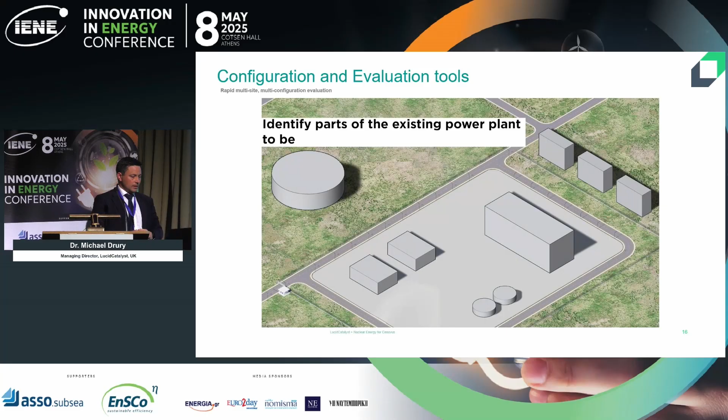So what we've done is we've looked at how we can repurpose old coal-fired power stations using this approach. We have a kit of parts that looks at the existing power plant and what can be reused and what can be upgraded or what needs to be replaced.

We look at how those advanced heat sources, the heat boxes - effectively nuclear reactors - can be positioned, not as one large reactor, but multiple reactors side by side, like Lego bits coming together to repower those coal-fired power stations.

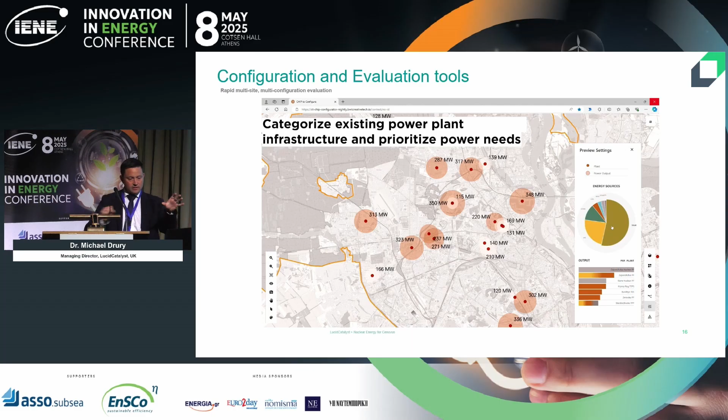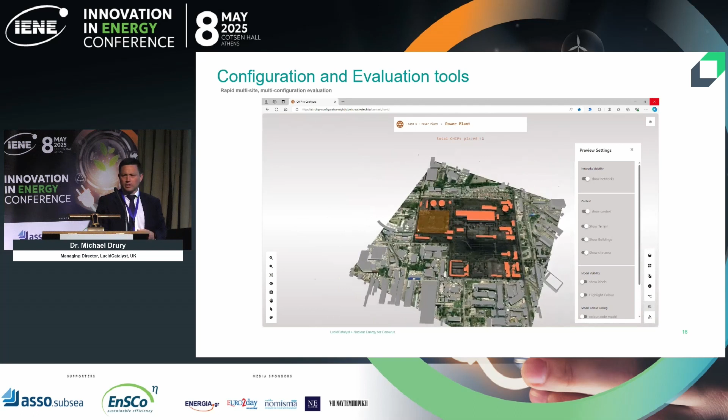We've looked at how we can optimize the deployment of those, how we can get the configuration tools, the software to look at, well, if I do it at this site, this site, this site, there's 15 different sites, or 40 sites, or 100 sites, how we can optimize the schedule to deploy that technology. So we can look in detail about what the configuration is for an open architecture.

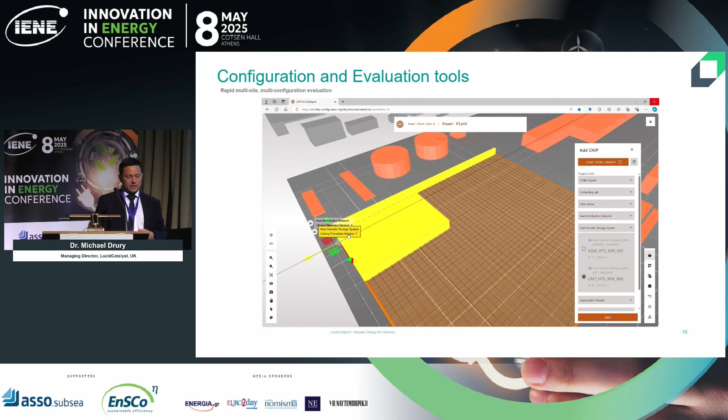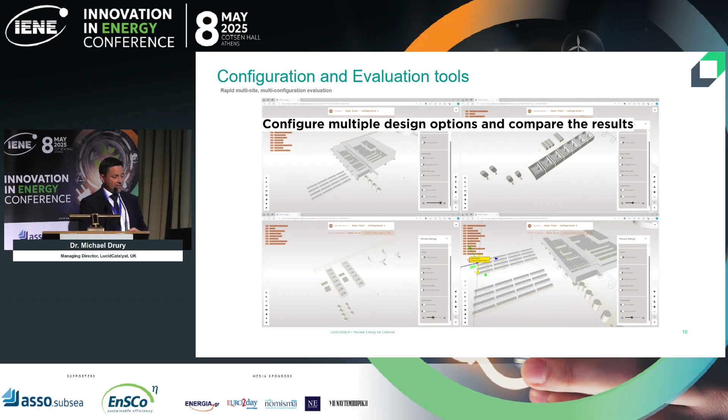So if you want to have a laptop, you have a USB port and you can plug it in. Everyone knows you need a USB port. It's almost the same you could do with nuclear. You can have the balance of plant where everyone knows if I can plug into that balance of plant, then I can put my reactor on it. But what kind of reactor would you have? You'd have smaller ones that can fit into that configuration architecture.

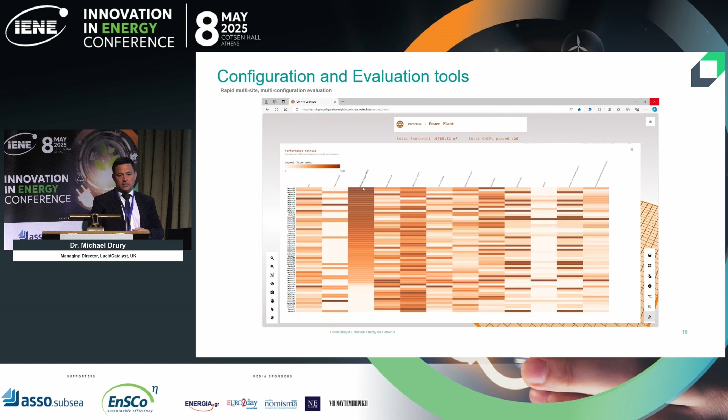By doing that, you can streamline what are the benefits to each region, each location, each site, and why is this the best way to deploy? What savings would you create? What kind of opportunities can you give to people with their workforces? How could you implement it with all the different industrial applications that are near it? What's the optimized approach for deploying nuclear technology?

So as I mentioned, we use an open architecture approach, which you can combine together on any of the sites with the site configuration tools that help you to map the detail of those sites. We use AI and digital licensing, and that's a big statement to say we use AI. But what I really mean is we're working really close with Microsoft on developing an artificial intelligence tool that allows us to do the site planning applications for any nuclear site.

So right now what we can do is we can generate your environmental impact assessment, not within 3 to 6 months, within 3 minutes, if not faster, if I'm honest. But what we have to do is we have to train that AI. So we train it and we develop it. Microsoft developed the back-end side of it, and of course it will use their Azure platform, which is where everything gets hosted.

So you'll have services that come out of the back end. But it allows us to develop that licensing application much, much faster, which is what you need to be able to support new industries.

So if you look at repowering using this approach, you could, yes, have coal-fired power stations with a standard module that fits into those stations, and you reuse a lot of the technology. But you could apply the exact same approach to shipyards and look at how you do fuel production platforms, or you could look at FPSOs and how the oil and gas industry could decarbonize.

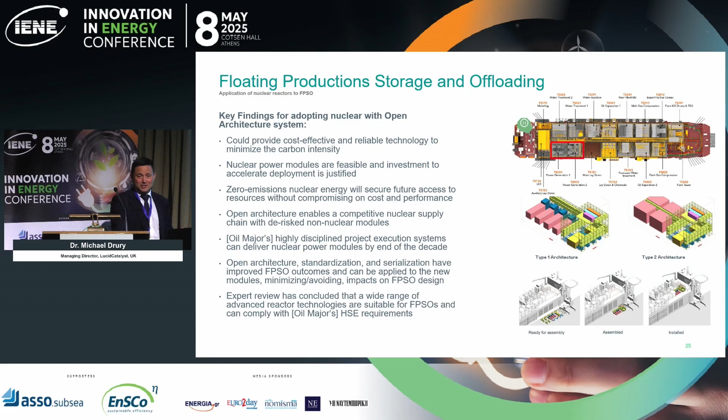And I'm not just saying this with nice pretty pictures that we've drawn. These are from where we've worked with customers, oil and gas companies, to utilize nuclear. That kind of sounds strange to me to always say oil and gas companies, but we're looking at not just a small-scale production unit with a small little reactor that does a small power. It's about being able to lump those reactors all together, and by doing that you can scale to any size.

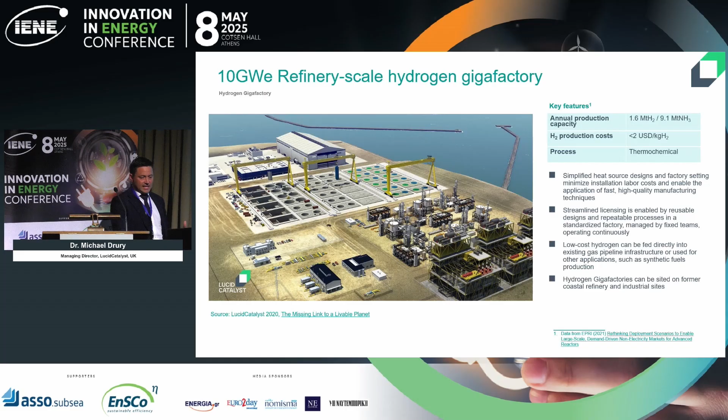In fact, this is a 10-gigawatt hydrogen gigafactory that we were looking at, in particular using a light water reactor technology. It doesn't have to, but this is the one that they wanted to look at. And you can start to see maybe there is a different way to get energy demand to sites, a different way to get that price of energy down with a bit of analysis to get the costs right down to be competitive.

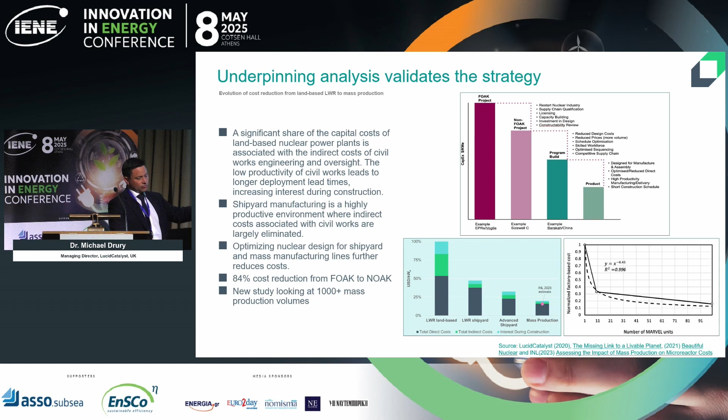Maybe there's a way that we can start to use that strategy, that analysis, to underpin how we get energy and the capital cost of energy from $6,000 per kilowatt down to $2,000 per kilowatt. Because if you can do that, nuclear becomes really, really attractive to every energy user.

So as we go through, we start to hit those new industries, and we have to work at an industrial level, and it's not just one area for nuclear. Now what we're finding is I'm no longer presenting to a nuclear audience. I'm now presenting to a lot of people that have never worked on nuclear. Data centers are calling me in, oil companies are calling me in to talk through how do we convert our cruise ship into a nuclear-powered cruise ship?

How do I convert our drilling rig to a nuclear-powered drilling rig? There's a lot of challenge, a lot of change, but the underpinning analysis that we do, working with lots of people that you'll have heard of - in fact, you can see some of those names on here - we start to really get into the detail of how you would do it for nuclear and what kind of things you would need to do.

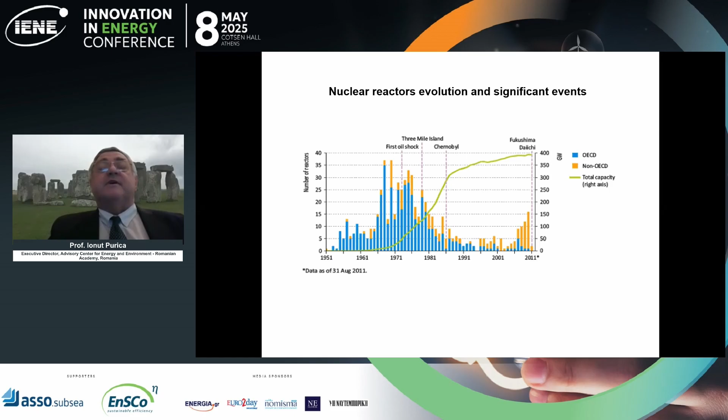And the idea is that although nuclear has saturated up till and a little after the Fukushima accident in 2011, now there's a new start with everybody doing various types of reactors.

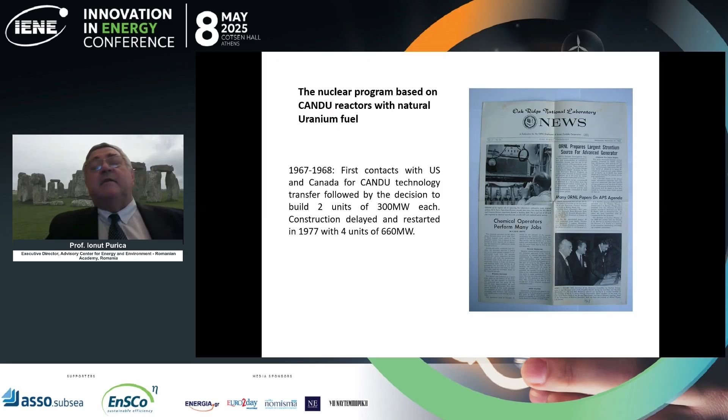Romania started back in '67, '68 to cooperate with Canada, with the approval of the US Congress, to transfer natural uranium fuel CANDU technology to a country that at the time was a member of the Warsaw Pact. Glenn Seaborg and Romanian Horia Hulubei were discussing and agreeing on transfer of technology.

And now Romania has a full fuel cycle, actually starting with uranium ore, with still sizable reserves of uranium, although we are buying outside the country just to keep our uranium in reserve. The fuel ore is processed into CANDU fuel.

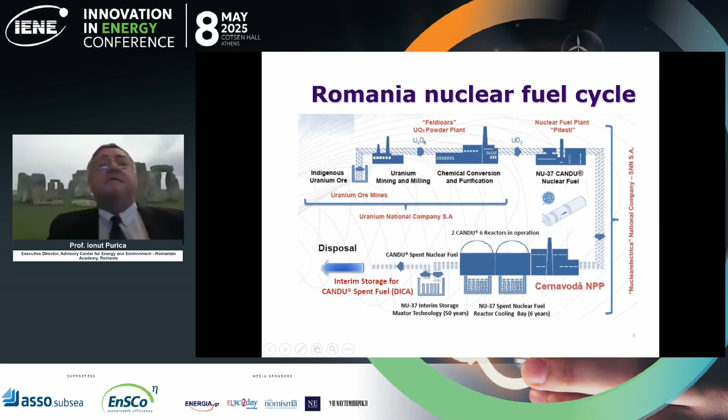CANDU fuel that goes into the power, 2 units, 700 megawatts each, in operation, and then the waste fuel is disposed. This is a picture of Cernavodă nuclear power plant.

The first 2 units are in operation. You don't see unit 1 - it's, wait a moment, it's here.

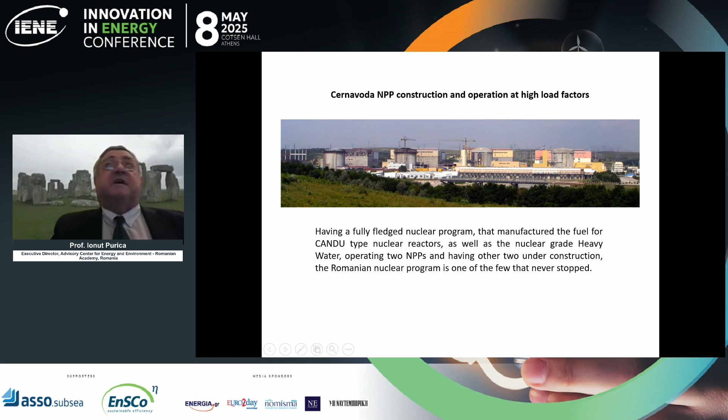And it's units 3 and 4 that are now under financing to be finalized. They are about 30-35% ready. Let me talk about the nuclear.

Sorry, it was the Minister of Energy on the phone, so I had to make a small pause. The idea is that units 3 and 4 are contributing to the security of the operation of the system, of the whole system.

And it's a very interesting thing that Romania is now doing first research on a type of small modular reactor and developing the construction of another type that was the first type of reactor certified by a Nuclear Regulatory Commission in the States.

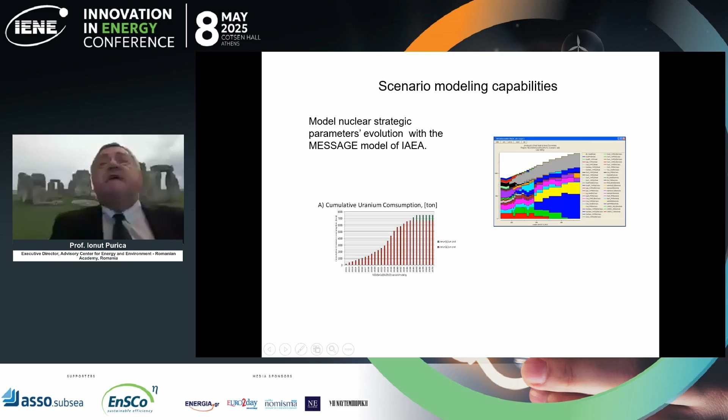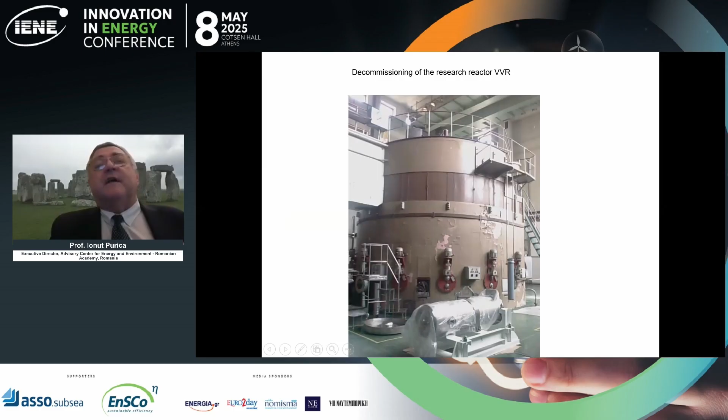Just to make a little history, it was called power reactors in small packages back in '68. And the United States had a full program of all sorts of such reactors that were either put in transport by plane, for example, put in some military bases, or in the McMurdo Antarctica base, also put on a ship that was sent to various locations to supply power and even heat.

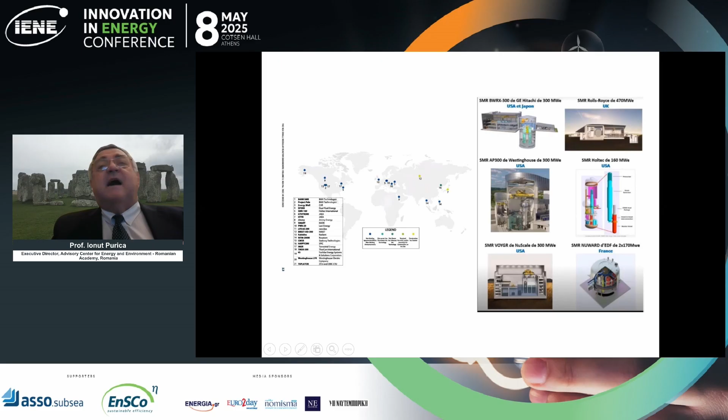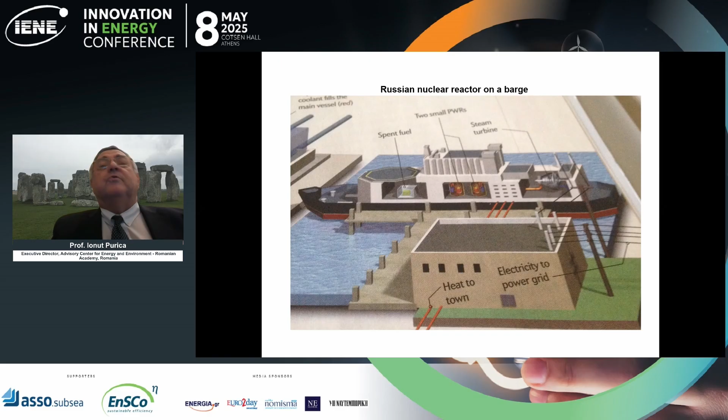Nowadays we have evolved a lot. There's a frenzy of small modular reactor designs. You have some examples, and obviously the Russians have put some reactors on a barge, and they are sending it on the rivers in Siberia to supply power and heat to the cities there.

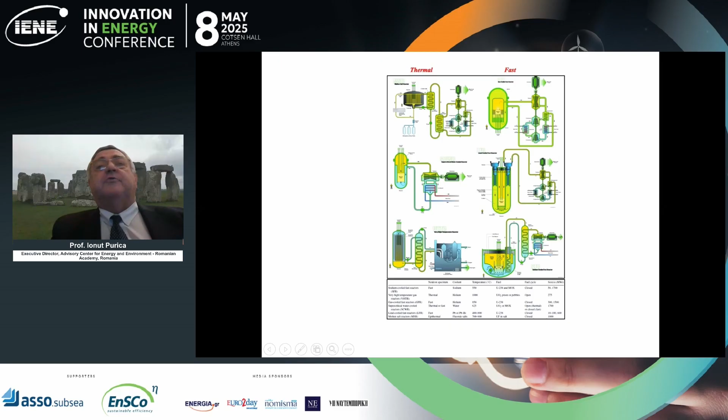Basically, there are thermal and fast breeder reactors, and you have a selection step here. I don't want to get into these details.

This is NuScale. I told you we are making a power plant with 6 nuclear reactors like that, small modular reactors. That's why they are called modular.

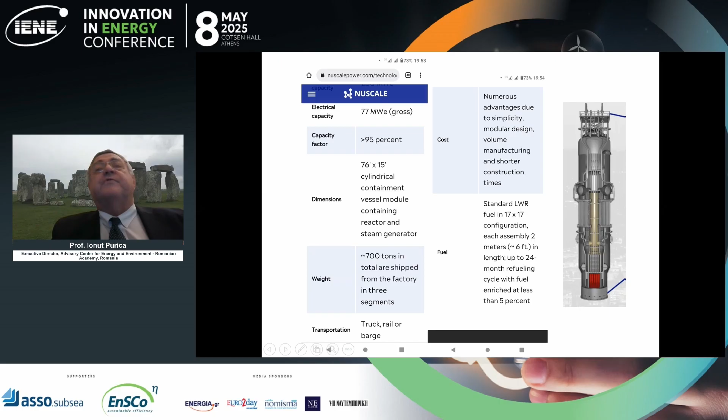And obviously, the thing is that we are in a position now to make the engineering procurement and construction study to finalize the first stage of this power plant. It is financed.

Finally, I want to mention that together with Ansaldo and Enea in Italy, we are developing an advanced lead fast reactor European demonstrator, ALFRED. You know, these acronyms are sounding nicely sometimes.

The idea and the advantage of developing such a model of small modular reactor, it's about 300 megawatts thermal. That means 100, 120 megawatts electric power, is that fast breeder reactors are able to use fuel that is made out of waste fuel from CANDU.

Just mentioning that uranium-238 in waste fuel is actually turning into plutonium-239 that is fissionable and used in fast breeder reactors like this one. This is actually reducing the amount of fuel deposit.